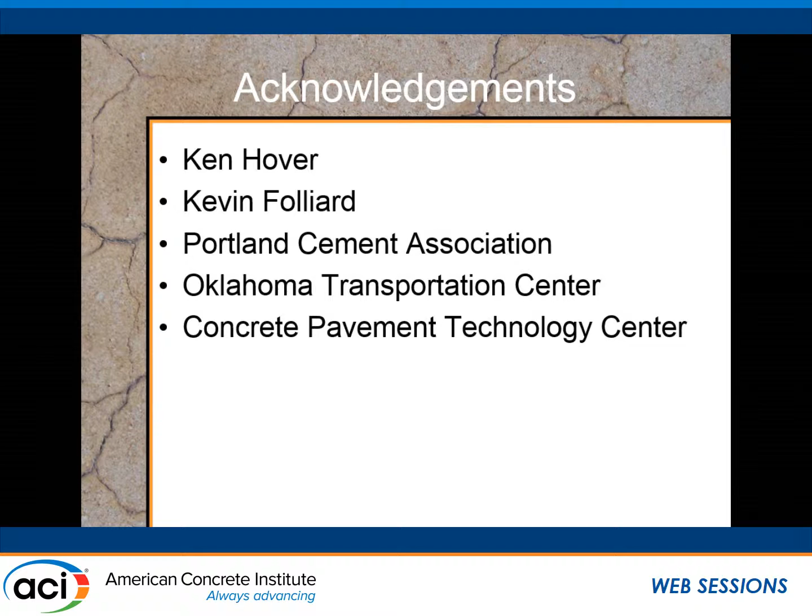I also have to thank the folks that funded the early research on it, and currently there is a research project going on. It's a pool fund study by 16 different groups, all to investigate some of the stuff that I'm going to talk to you about today.

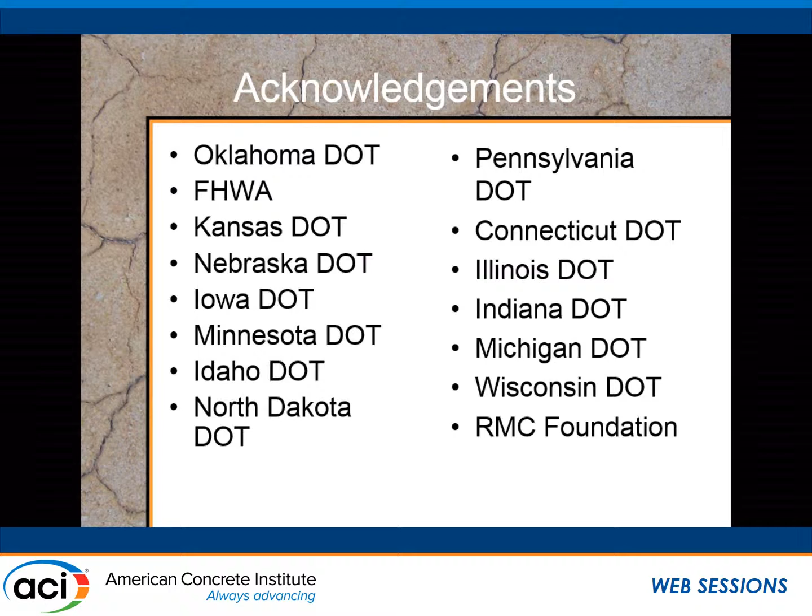So we're going to talk about some basics of air entrained concrete. We're going to talk about the super air meter, and then we're going to talk about the future.

So de-icer salts, that's what we're here about, to talk about today. That's what brings us all together. And the use of de-icer salts are critical for the safety of our traveling public, right? We don't want families sliding off the road, right? We need to take care of that ice, okay? And the highway agencies are becoming much more aggressive, using different de-icers, using pre-treatments, using all kinds of actual techniques to try to make our roads more safe.

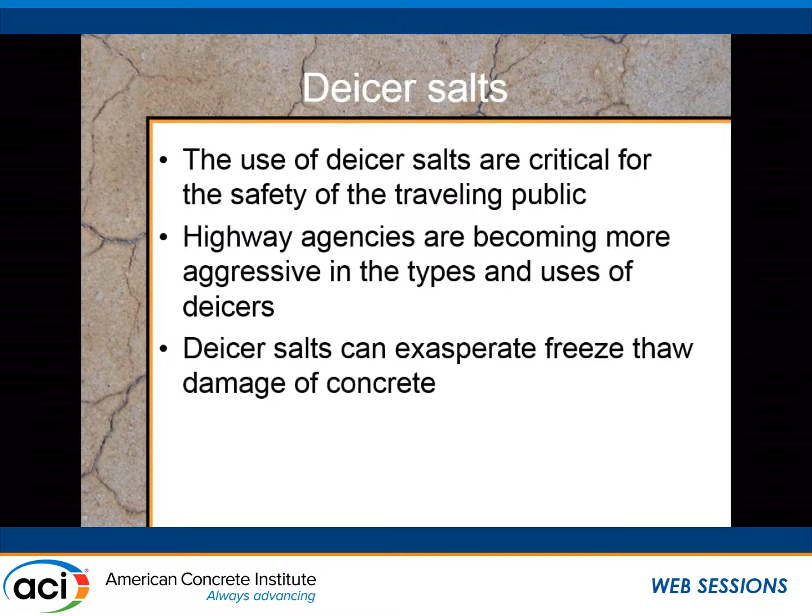De-icer salts has been talked about before, can exasperate freeze-thaw damage of concrete, and this isn't going away. Okay, we've got to figure out how to handle it. We've got to figure out how to deal with it. We're going to talk about freeze-thaw today.

And when we talk about freeze-thaw, it's all about the freeze-thaw triforce. It's all about three things. For freeze-thaw durable concrete, you have to have durable aggregates. You have to have high-quality paste. And you have to have a high-quality air void system.

But I'm only going to be talking about the air void system today. Everything I'm talking about cannot help you if you're next door in the D-cracking seminar. I can't help those folks. Air doesn't help those folks. Well, maybe a little bit, but not really.

I can't help you if someone adds way more water to the concrete than they're supposed to. Can't help you. Can't help you. But air void systems, that's going to be helpful today.

So why the heck do we add air to concrete? Because it's not very strong, right? Well, these air bubbles happen to be the key to the freeze-thaw resistance of our concrete. This is really important, ladies and gentlemen.

Air volume is not necessarily equal to freeze-thaw performance. It's not about the volume. It's about the size distribution of the bubbles. Smaller bubbles are much more effective in providing freeze-thaw resistance than larger bubbles. And let's talk about why.

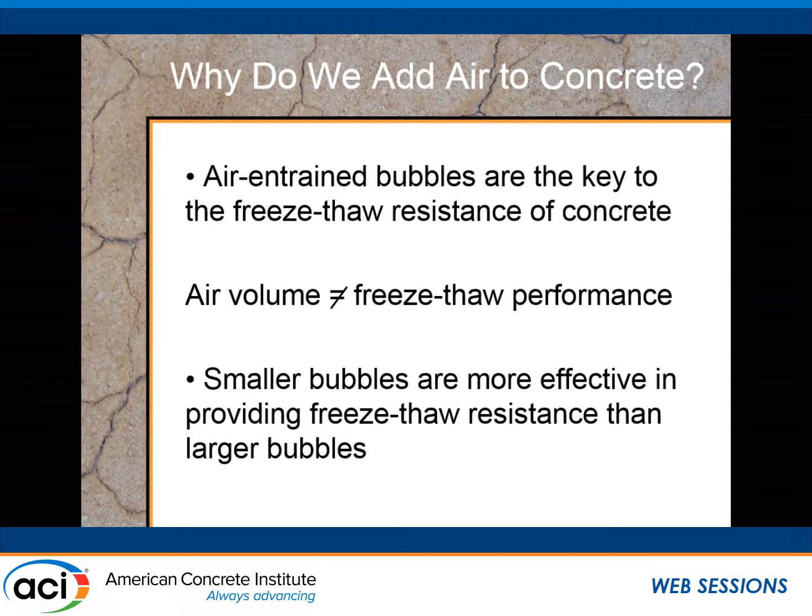So I've got two air void systems, one on the left, one on the right. Both of them have the same volume of air. But we would much rather have the air void system on the right. We'd much rather have the small, well-distributed bubbles.

And why is that? Well, if I'm a water molecule and I'm in this paste and I start to freeze, I just want to escape to a boundary. And if I can provide much more boundaries inside, it's going to provide much more protection. This concept is called the protected paste concept. And we can see we get much more protection out of the air void systems on the right than we do out of the air void system on the left.

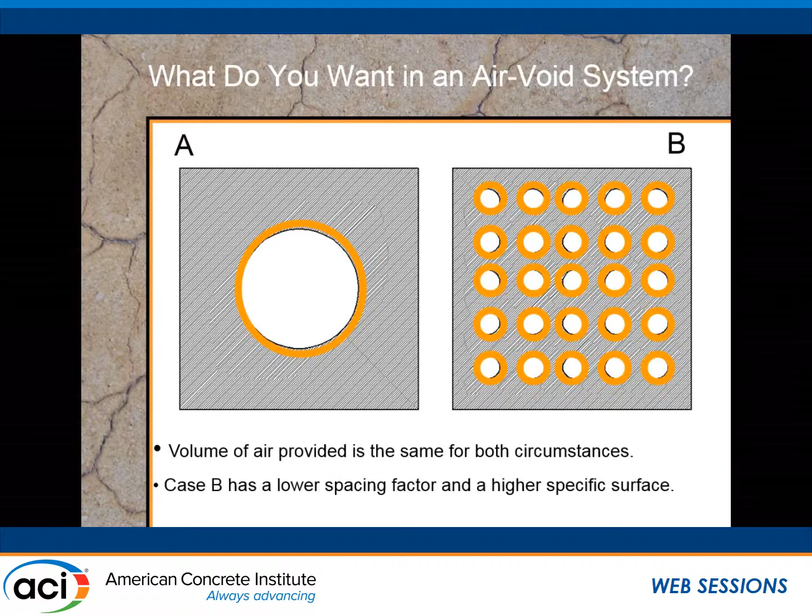So what's that mean? We want small, well-distributed air bubbles.

And it's about distribution, not always about volume. So I'm going to show how we get this information.

Well, the only way to get it now is through a hardened air void analysis. You have to cut concrete, polish concrete, and go through it. Every time you go through this line, you have to hit a button. When you enter a bubble, you have to release the button when you leave the bubble, and it takes a long time. It's not very fun. But out of that, you get this magical number called the spacing factor.

Spacing factor was developed by T.C. Powers. What Powers did, he used 2D stereology to take the 3D air void system and turn it into an equivalent kind of synthetic, supplementary air void system to the real 3D distribution. This is like an idealized concrete or idealized air void system, with average size voids at an average spacing inside the paste. It takes twice the spacing factor number as the diagonal. If you didn't understand anything I just said, it's okay.

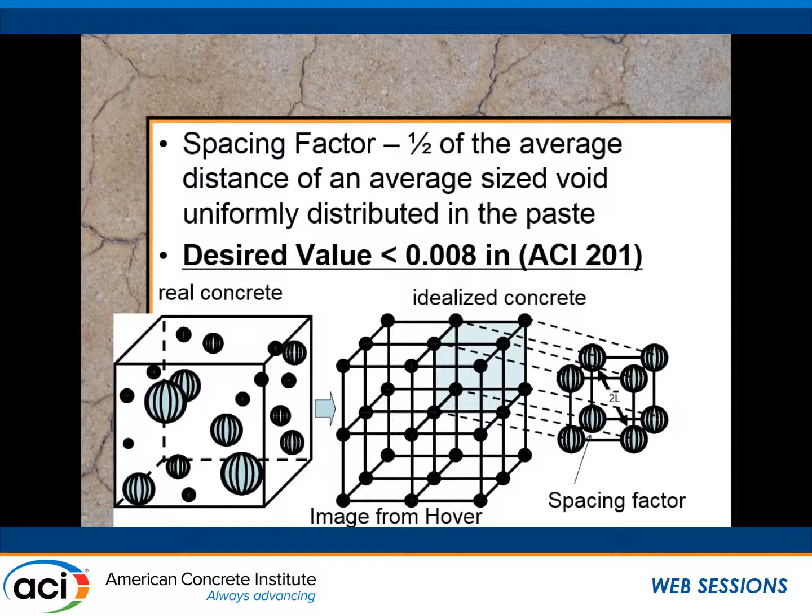Because the desired value, what you're after, what everyone's shooting for, is a number that's less than 0.008. That's the magic spacing factor number. So why can't we just use air content, or total air? Why do we need to care about air void size distribution?

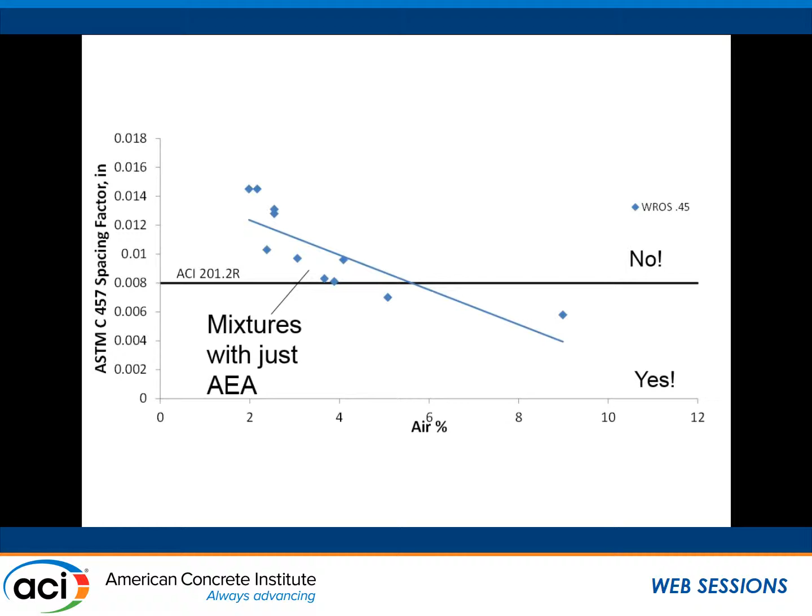Well, let's look at stuff like this. Here we've got air content plotted versus spacing factor. This is a mixture that just has air entrainer in it, just air entrainer. As you add more and more air, spacing factor goes down, goes down, goes down. When you get about 5.5% air in the concrete, you would hit your magic 0.008. People would be happy.

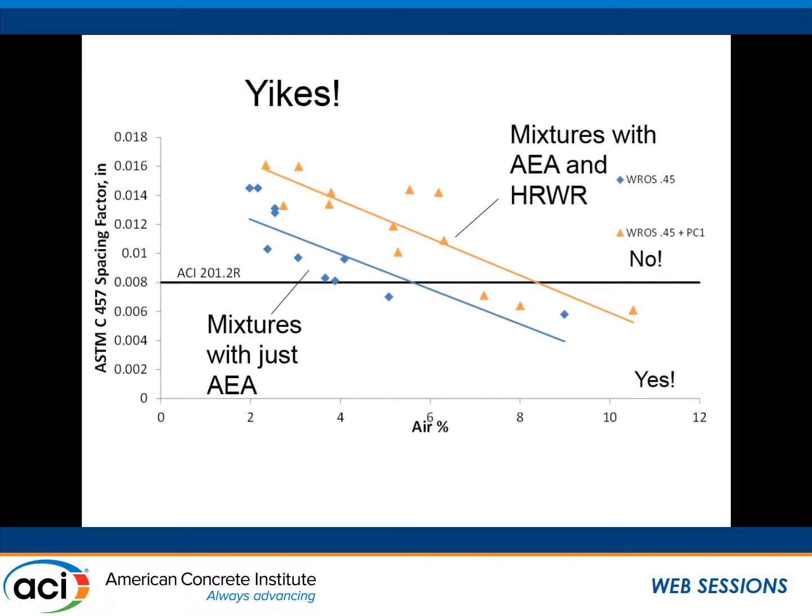So how do you specify this? If you're an owner, and now we're telling you that depending on the admixture combinations, you may need different volumes of air - that's tough, and this is why I call this the yikes graph. This is the oh my gosh. This is kind of interesting.

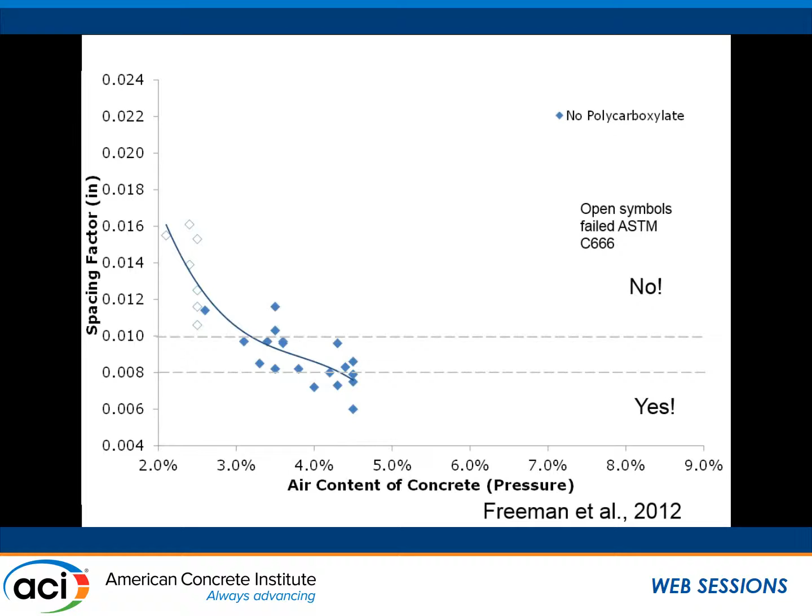Okay, that's neat, that's air. Let's introduce a little bit more data. Again, I've got air content down here at the bottom, spacing factor over here, and some data points that are filled and some that are open. Anytime it's an open data point, that means it failed the freeze-thaw test, the C666 test - meaning the durability factor was less than 70. So this suggests that if I get 3.5% air in my concrete, I'm going to be good. These are mixtures with just air entrainers in them.

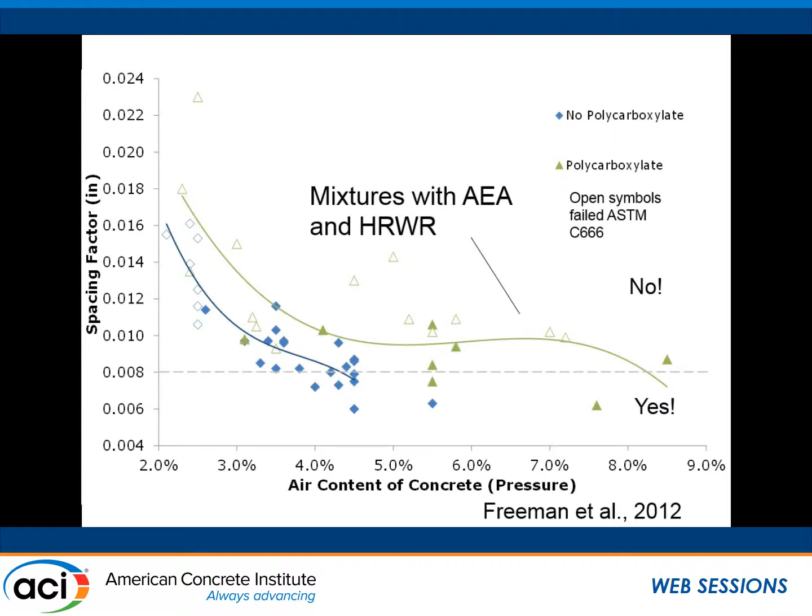Let's look at some mixtures that are a little different - combinations of 5 different commercial high-range water reducers and common air entraining agents. We can see there's an offset in the line, and we notice we have all kinds of open symbols. These are kind of interesting. 7% air is enough to meet every single specification in North America as far as total air content. Yet we're showing that at least in this very aggressive C666 test, they would not pass. So why does this happen? Why is this going on?

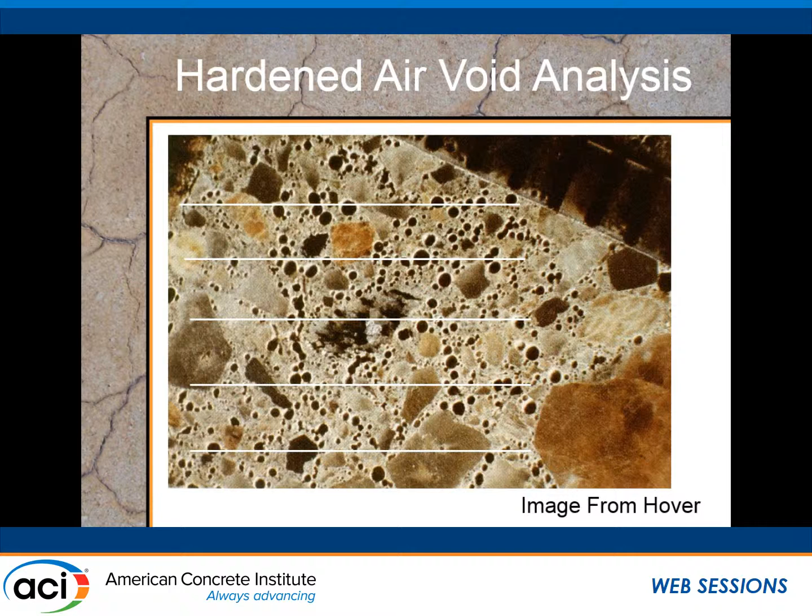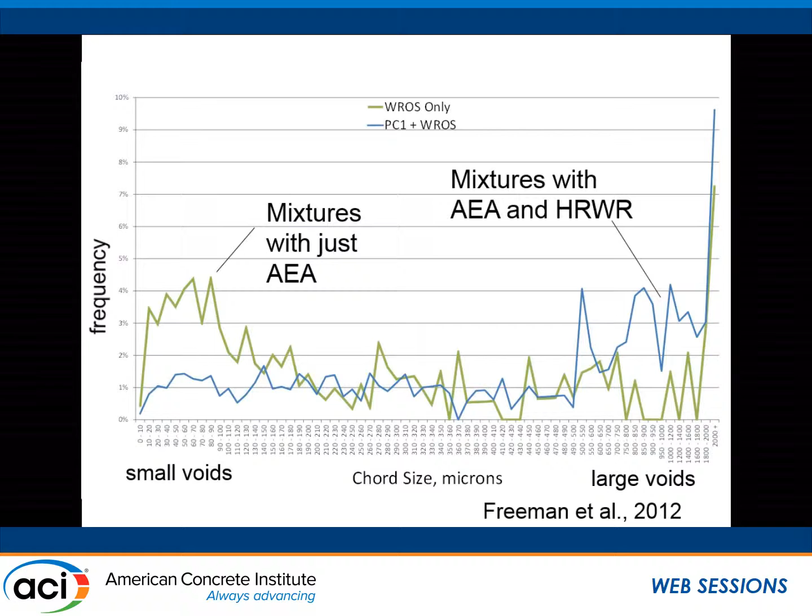We can see here that when you add air from mixtures with just an air entrainer, you get a lot of small voids. That's good, that's good, it's good. This doesn't happen in all of them, and I need to stress that - this does not happen in all of these products, but in some, this system seems to have a lot more voids on the larger side. So when I get a certain volume of air, some more of those are larger voids than in this other scenario.

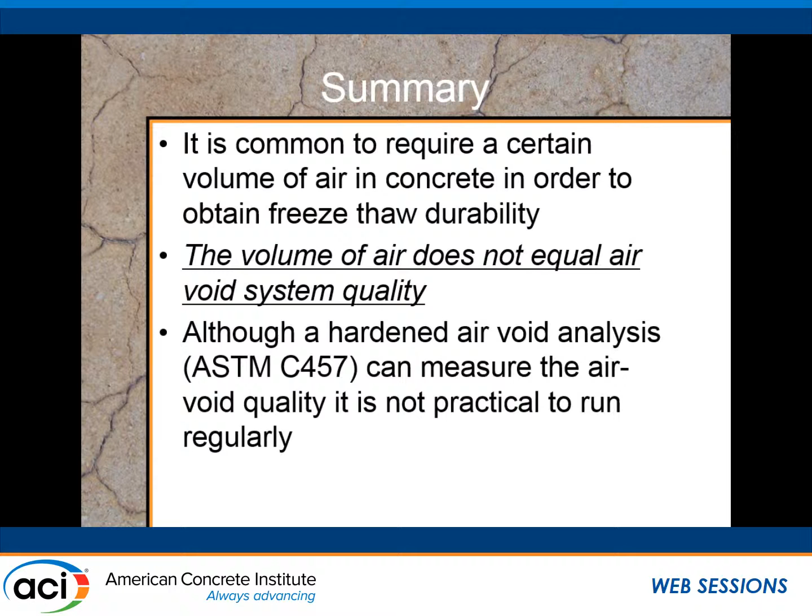So in summary, it's common to require a certain volume of air in concrete to get freeze-thaw durability. But the volume of air does not necessarily equal air void system quality. And although we could run a hardened air void analysis and figure all that out, that's not really practical.

So what do we need? We need a test that can quantify the air void system quickly in fresh concrete. We need it to investigate a significant sample size. It needs to be economical, and it needs to be field ready.

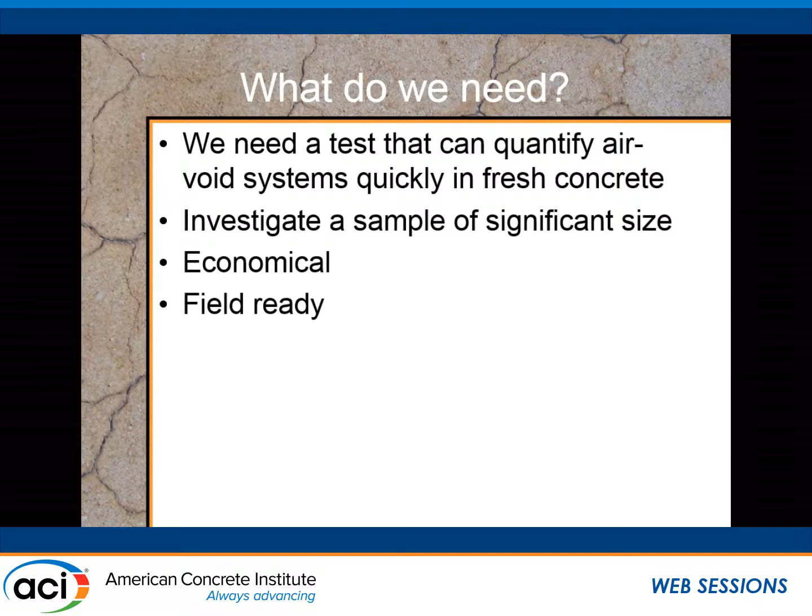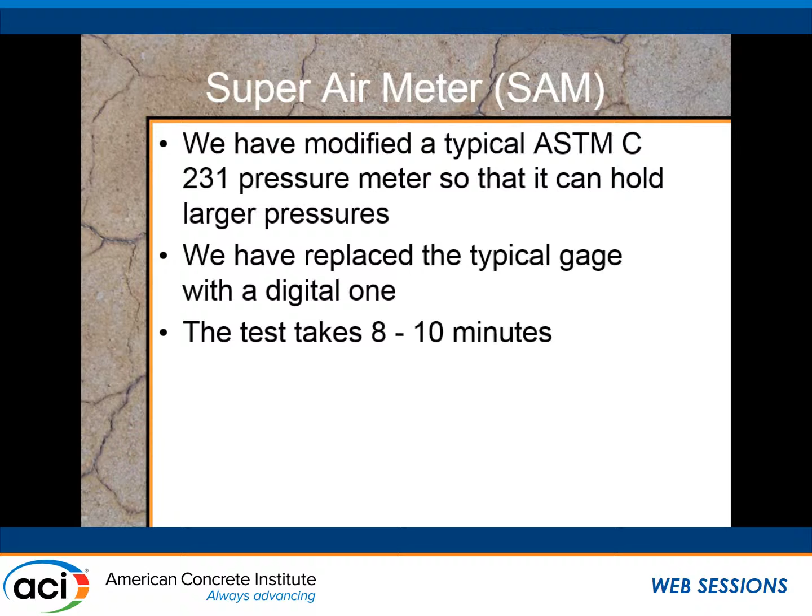I'm going to talk about the super air meter, or we call it the SAM for short. What we did is we modified a typical pressure meter so it can hold higher pressures, and we've replaced the dial gauge with a digital one. The test takes between 8 to 10 minutes to run depending how experienced you are. My students can do it in 8 or less.

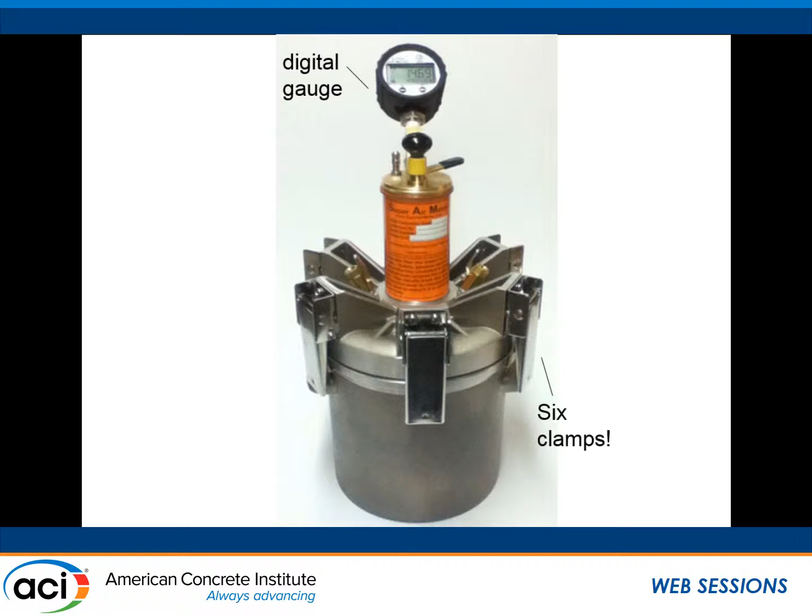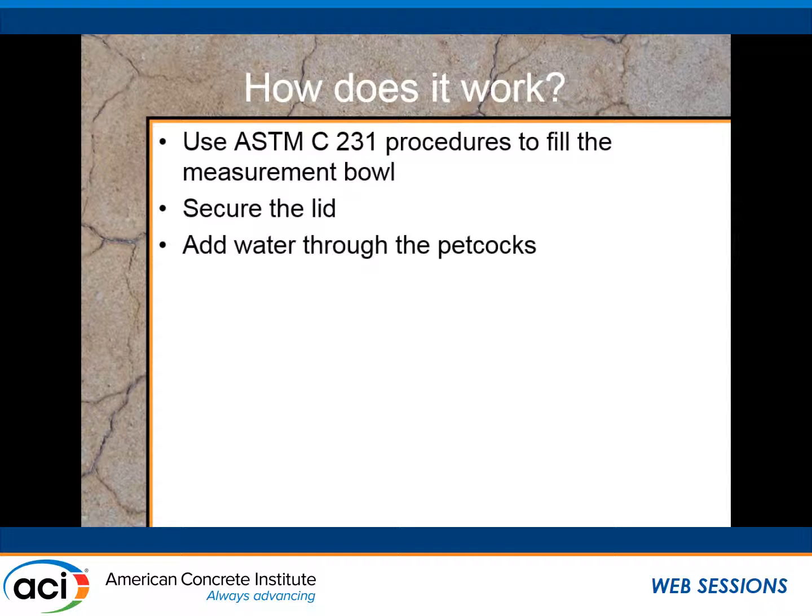So how does it work? Well, you fill the bowl the typical way we always do when we run a standard air test. Put the lid on it, add the water through the petcocks. We're going to be talking about what's going on in the top chamber and the bottom chamber. The top chamber just has air in it. The bottom chamber is where your concrete goes. There's the petcocks, there's the water.

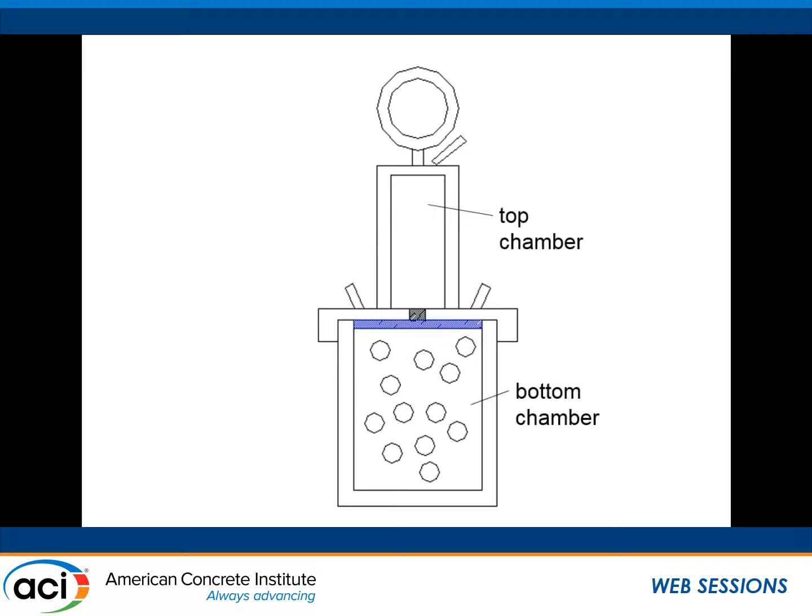If you look at this graph, we have time plotted here and pressure plotted over here. I'm showing the pressure in the top chamber and the pressure in the bottom chamber. We go up to about 14.5 psi, hit the lever, smack it with the mallet - this is what you commonly do when you run an air test. This is where you'd normally stop. But with the super air meter, you don't stop - you leave the petcocks closed and pressurize it again.

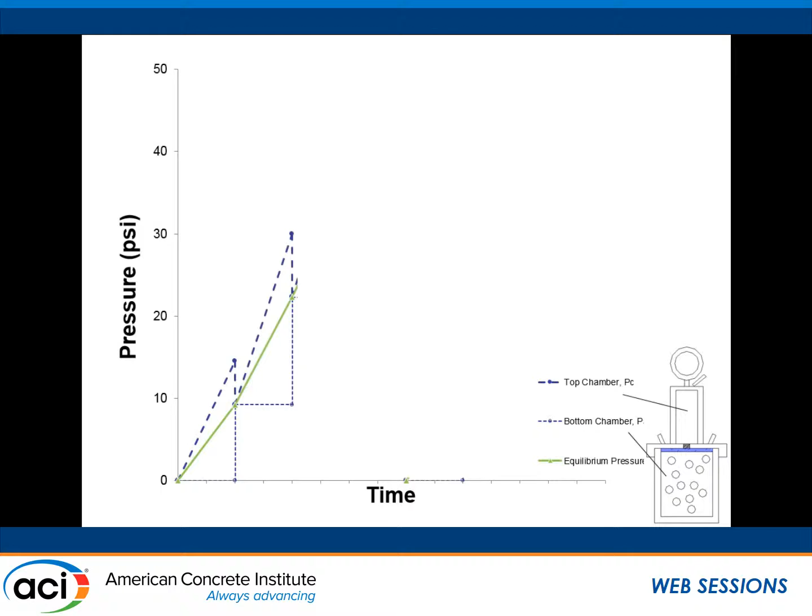This time you pressurize the top chamber up to 30 psi, hit the lever again, and smack it. Then you pressurize it up to 45 psi, hit the lever, smack it again, and you get a curve.

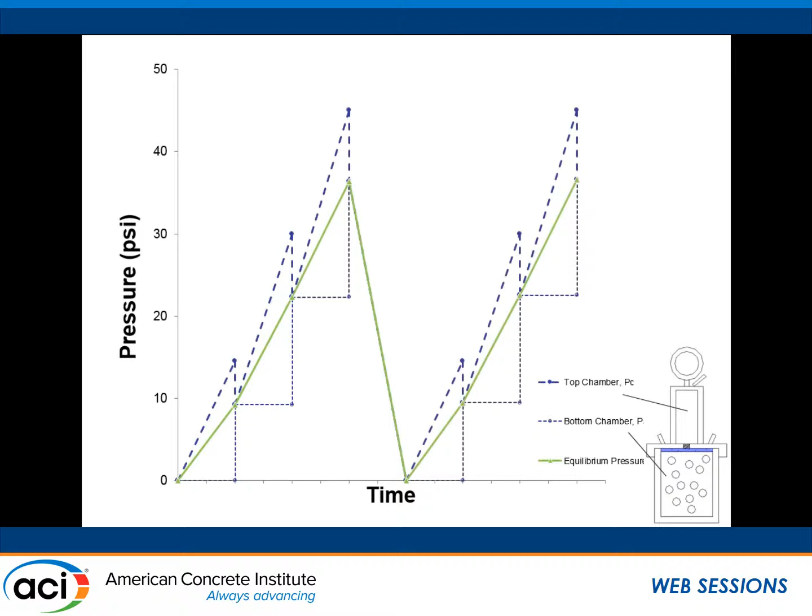Now you release the petcocks - be careful not to spray anybody, unless you don't like them - and then you do it again. You compare the first curve to the second curve, and if you look closely, you'll notice they're not quite the same. The differences between these curves is how we calculate the SAM number, how we actually find out what it is.

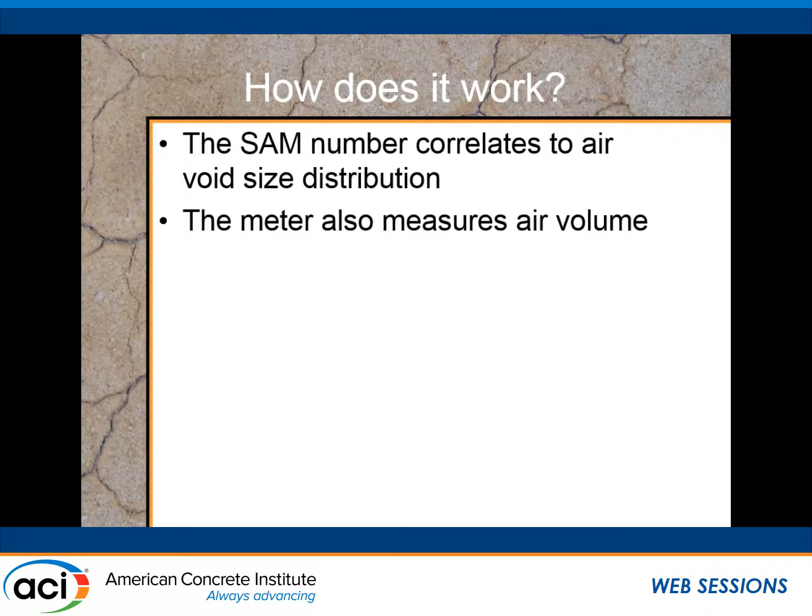So you'd say, how does it work? Well, the SAM number is going to correlate to air void size distribution - I'm going to prove that to you coming up. And the meter also measures air volume, so you still get air volume, but you get this other number too, the SAM. So how can we prove it?

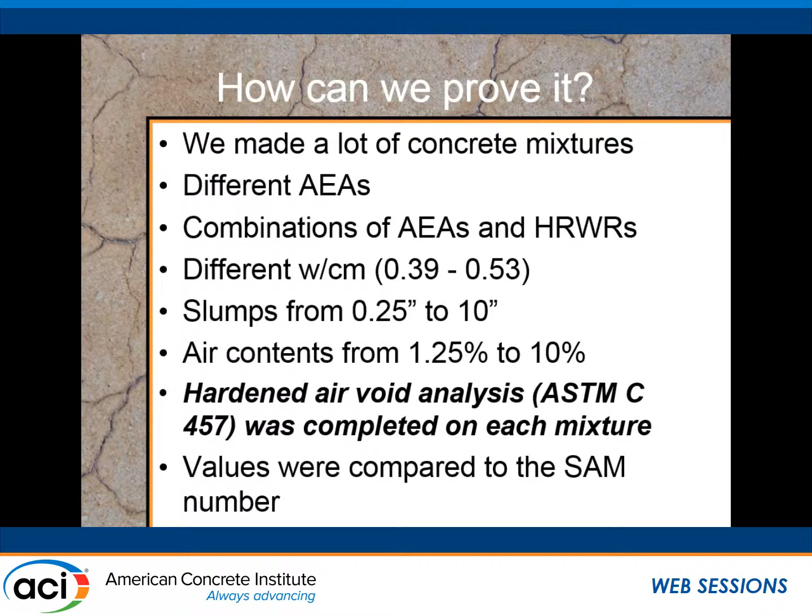We made a lot of different concrete mixtures with different air entrainants, AEAs, different combinations of air entraining agents and high-range water reducers, different water-cement ratios, different slumps, and different air contents. We did hardened air void analysis on every single one of them - about 95 different mixtures went into this data set. The values were all compared to the SAM number.

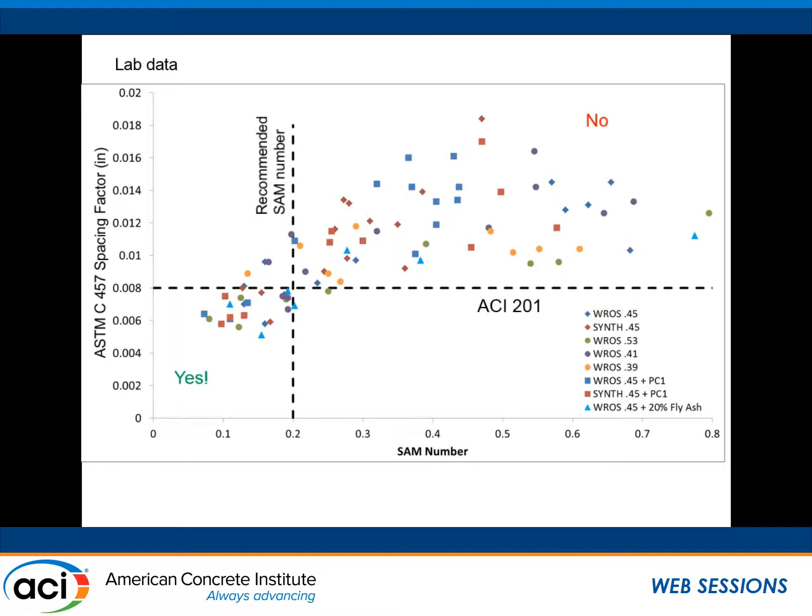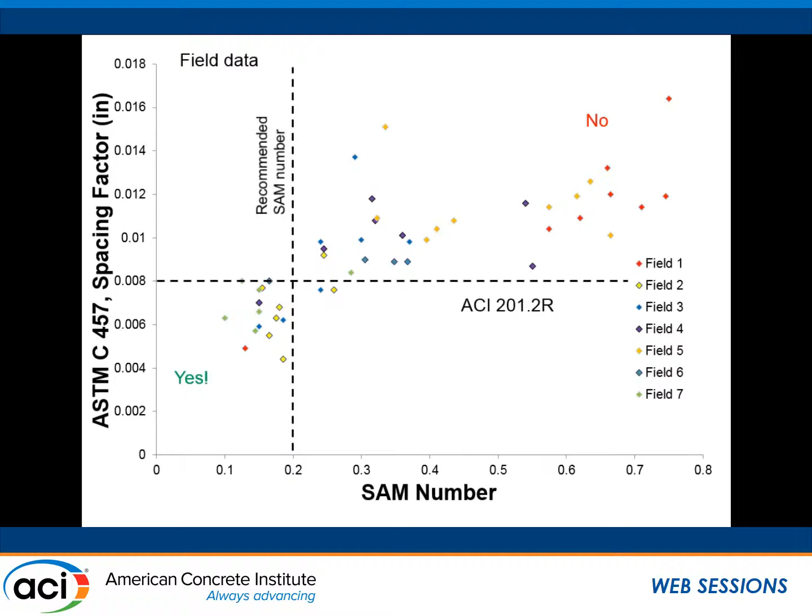Now then we went out and did field data - this is about 80 different field mixes. And again, we see it segments the data in the exact same way - there's 0.2, yes, no, it breaks it up. That's pretty cool. So this is work that's been done by FHWA Turner-Fairbank Labs on the super air meter, and this is what they got.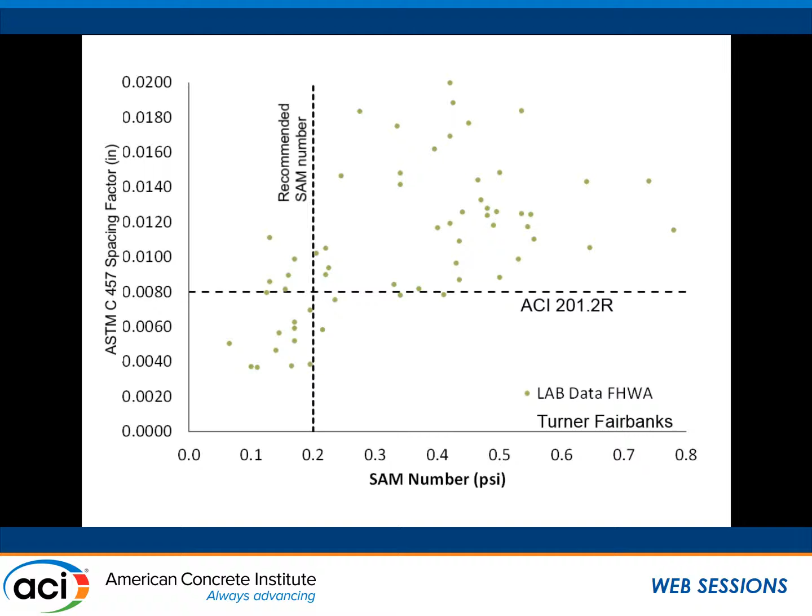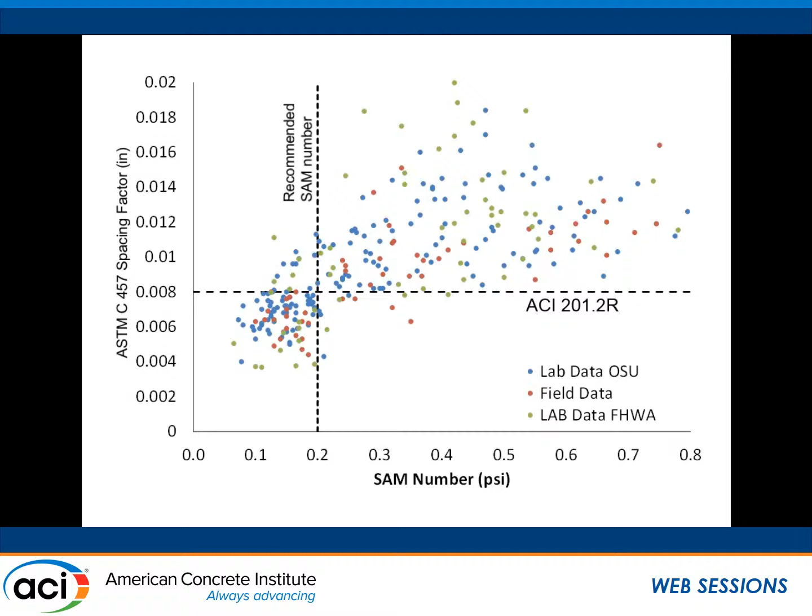Again, this breaks the data up very nicely. They've got like an 85% agreement, I think. Okay, so it's in the ballpark. It's close. And the cool thing is if you put all the data together, it's all agreeing, all suggesting similar things. As your SAM number goes up, your spacing factor goes up as well, and 0.2 does a pretty good job of segmenting the data.

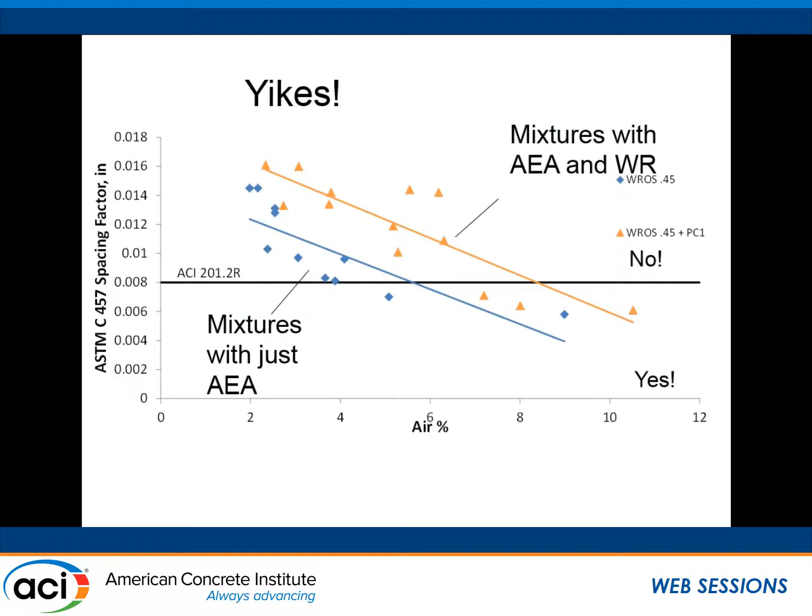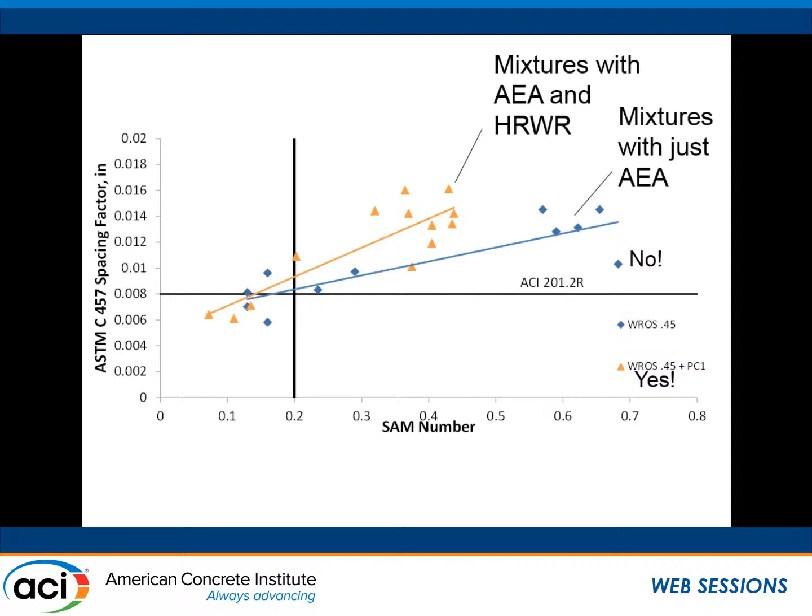So the great thing about this test is that you can take this graph. How do you specify for this? How do you handle this with air volume? Remember, that's air volume on the bottom, that's spacing factor over here. And when you use the SAM number instead, look, it all smashes down here right at 0.2. It does a good job. It helps segment out the data, and it helps make a decision whether this is an air void system that you want or that you don't want.

So people love freeze-thaw testing, and we're just getting started on that. Freeze-thaw tests take about 3.5 months to run, so they take a long time.

But we have SAM number over here, durability factor over here, and here's 0.2. Okay, and you can see this is great, great, great, and then you kind of fall off the hill of death if anyone's run a bunch of these tests. There's a hill of death right here. You just can't see it because everyone dies once they go there.

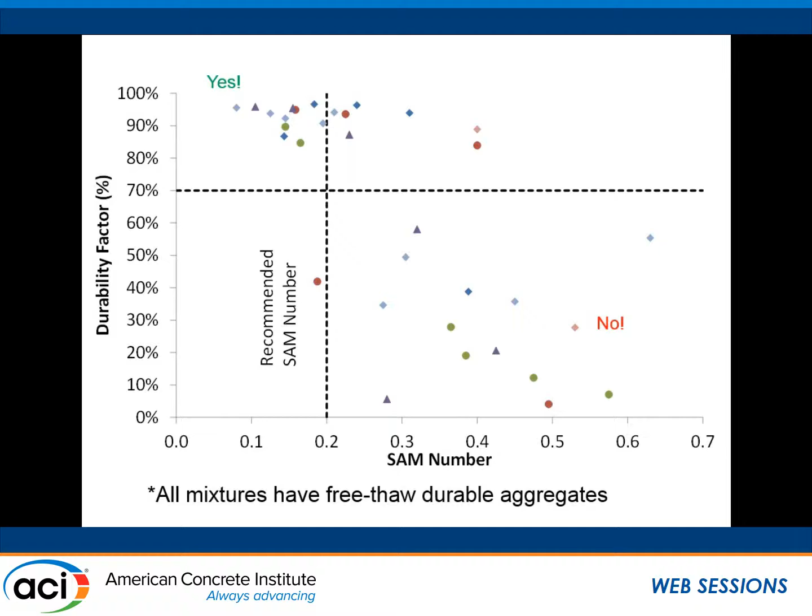Okay, but that's—you can laugh, you know, that's allowed, right? Okay, great. Only at the funny jokes, right?

So the SAM number of 0.2 seems to correspond to the spacing factor of 0.008. Over 90% of the data is correctly separated with this limit, and the SAM number seems to correlate with some C666 testing. Don't worry, a bunch more is coming.

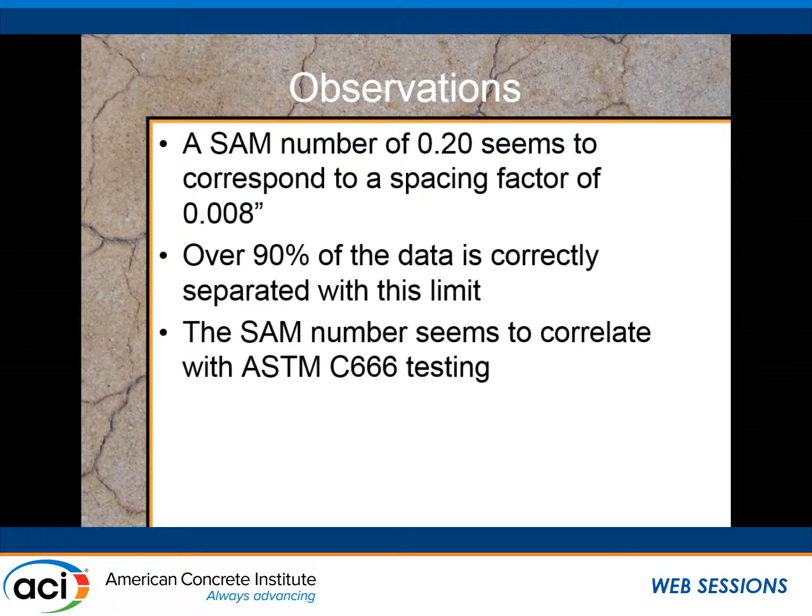So how consistent is it? Well, we ran 95 different mixtures with 2 meters, okay, and compared them head to head. We're going to compare air contents and SAM numbers. And there are some tweaks that have been made to make a typical air volume test a bit better.

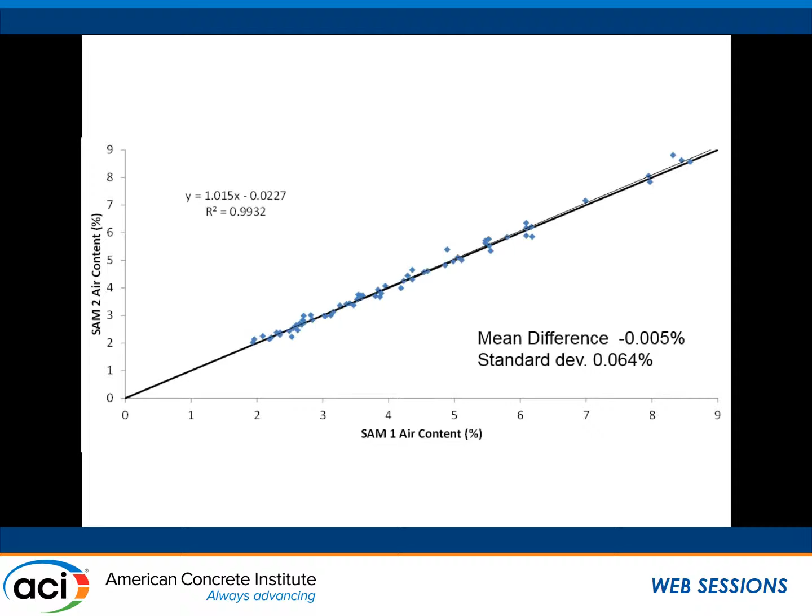And once you do that, if you compare SAM number 1 versus SAM number 2—this is like just the air content from the first SAM versus the air content from the second SAM—the mean difference is 0, and it's very, very tight. It does a good job, okay?

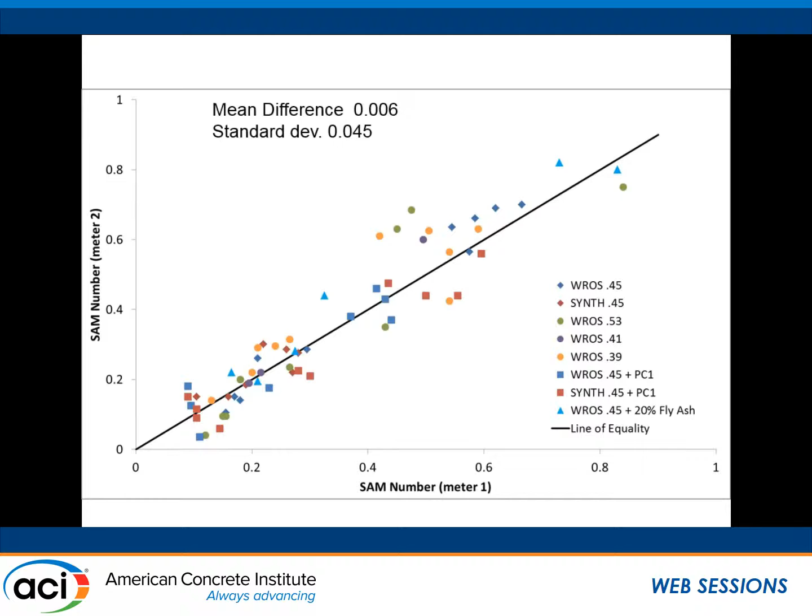But when you compare SAM number from meter 1 and SAM number from meter 2, again, the mean difference is 0. There's a bit more spread in the data, but again, not so bad. It's given us a lot of data that we never had before.

So I know you're asking about this: how does this work? How does it really work? What is the science behind what's going on here? We'll start talking about that, and there's still work ongoing.

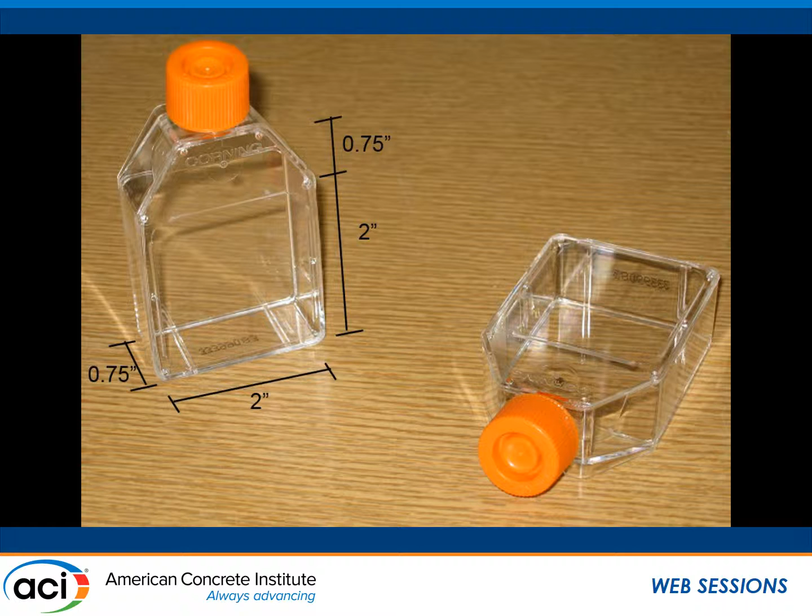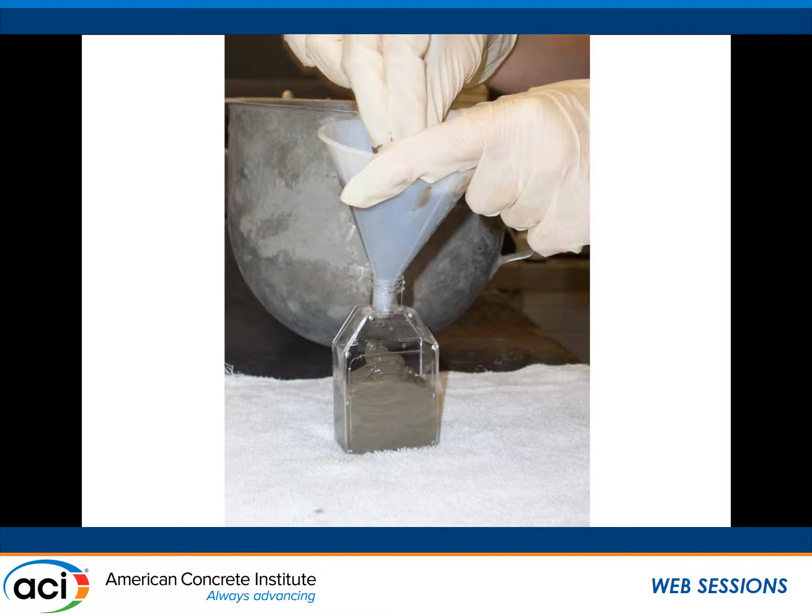We're going to take some bottles, okay, about 3 inches tall, about 2 inches wide, and fill them full of cement paste, okay? They're air-entrained cement paste. We're going to turn the bottles on the side. We're going to actually add a straw to the top and a bit of water, and turn them on their side. So this is the bottle. They're turned on their side, and some bubbles are going to rise up and get caught on the surface, and we're going to be able to look at them with a stereo microscope, okay?

And then we've got this air pump over here that we can pressurize the system, and we can look at the bubbles. This is really important: these bubbles are not inside cement paste. These bubbles are in the bleed water, right? They've risen up, and they're in the bleed water, okay? That's what we're going to be looking at.

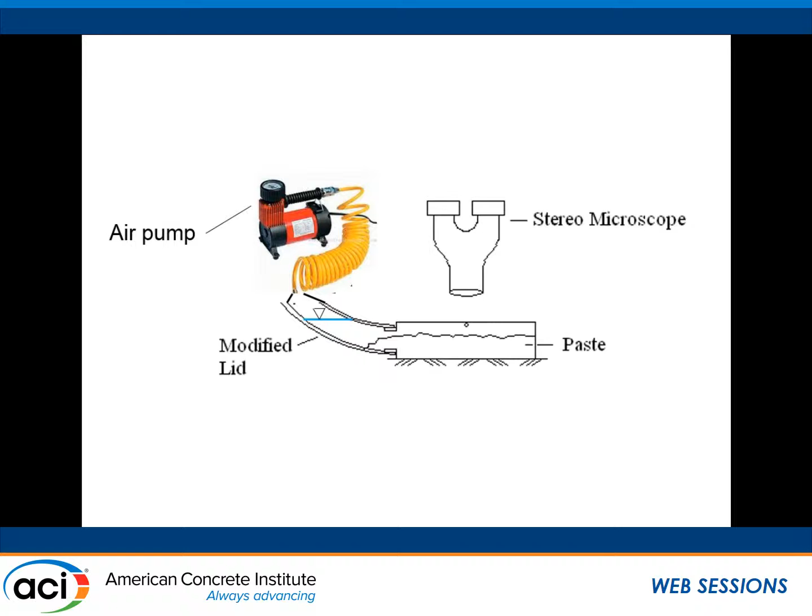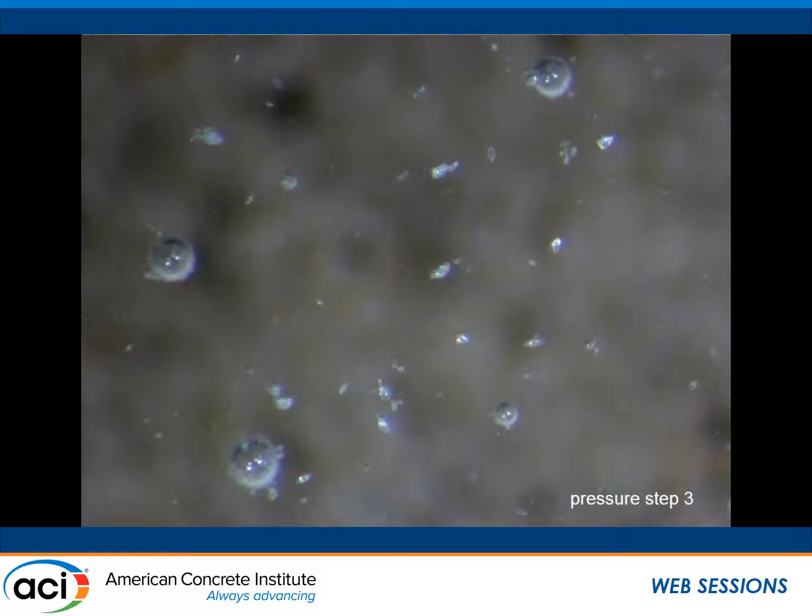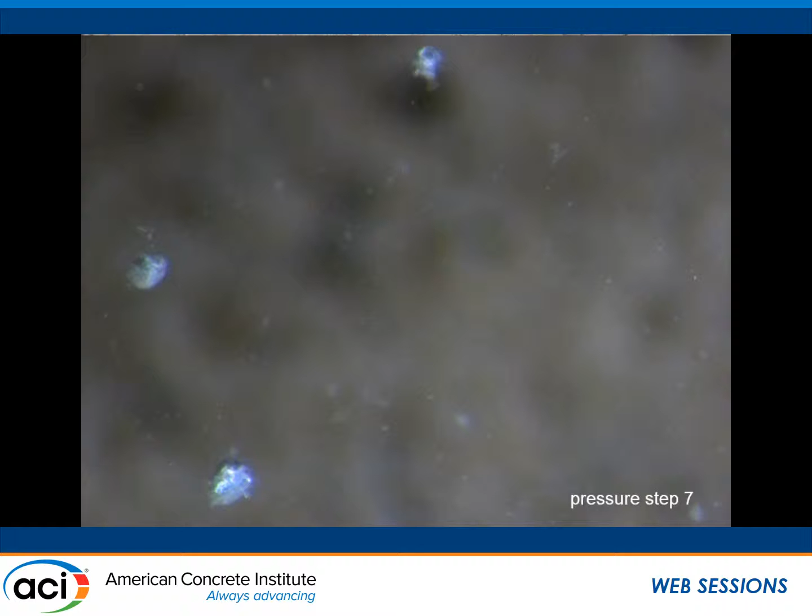So here's a typical air void system. Here's atmospheric pressure. Let's start looking at what happens when we go to 1 pressure. Things move around a bit. Here's 2—we can notice some of these bubbles don't look as happy. We go to 3—does anyone notice there's less bubbles? We go to 4, 5, 6. Holy cow, where are the bubbles going?

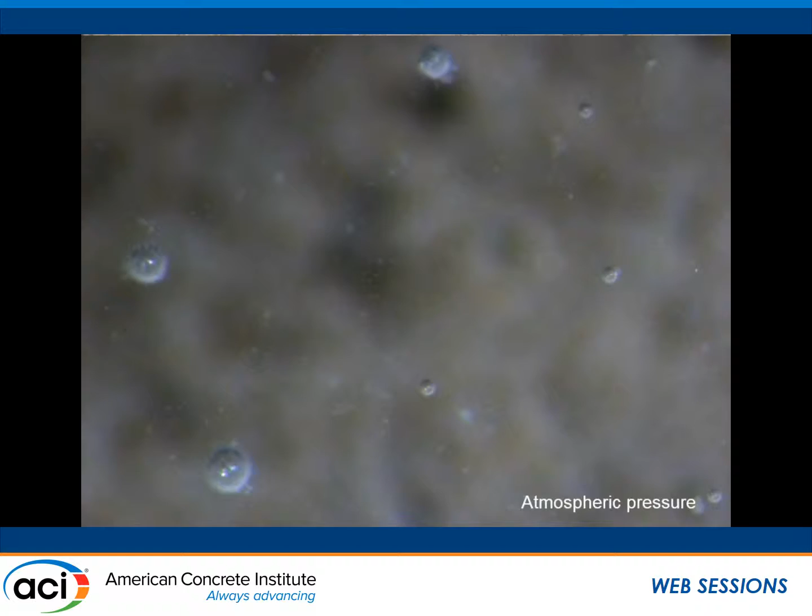Well, let's go back to atmospheric pressure. When you go back to atmospheric pressure, a couple bubbles come back. Some of these bubbles come back. It didn't dissolve—what's going on? As you increase the pressure, you're dissolving bubbles. You're dissolving it. Let's talk more about that. This is what it used to look like, and this is what it looked like after you brought it back to atmospheric pressure—before, after. So as you increase the pressure, you're actually dissolving the small bubbles into solution.

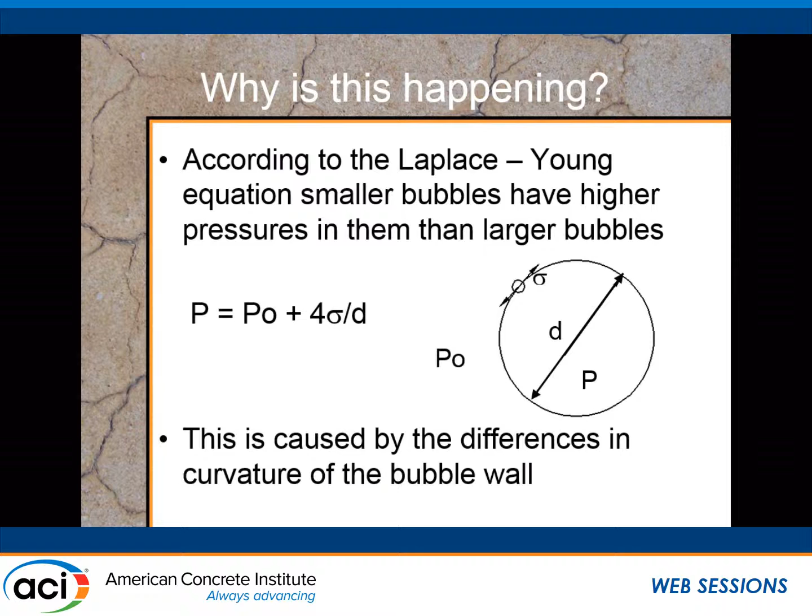So this means, since diameter is in the denominator, as bubbles get small, this internal pressure goes up. Let's look at a plot. Big bubbles, this is my pressure, not much above atmospheric. Small bubbles, higher than atmospheric pressure. Does that make sense to everybody? Smaller bubbles have a little bit higher pressure in them.

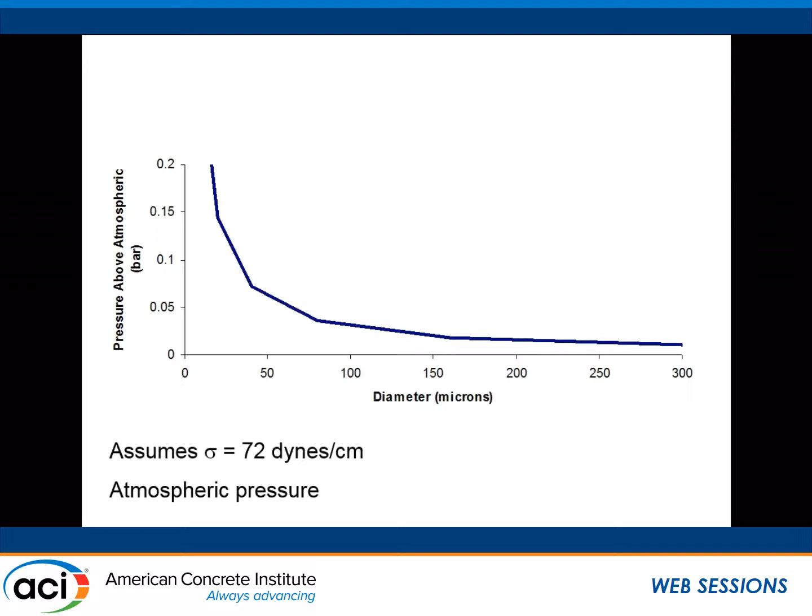So as you start to increase the pressure, when air gets to a certain pressure, it will dissolve. This is Henry's law. It's usually used for lakes and streams and people worried about pollution, stuff like that. But it says that when air, or any gas, gets to a certain pressure, it will dissolve and go into solution. Be gone, basically. So that's kind of what's going on with these small bubbles.

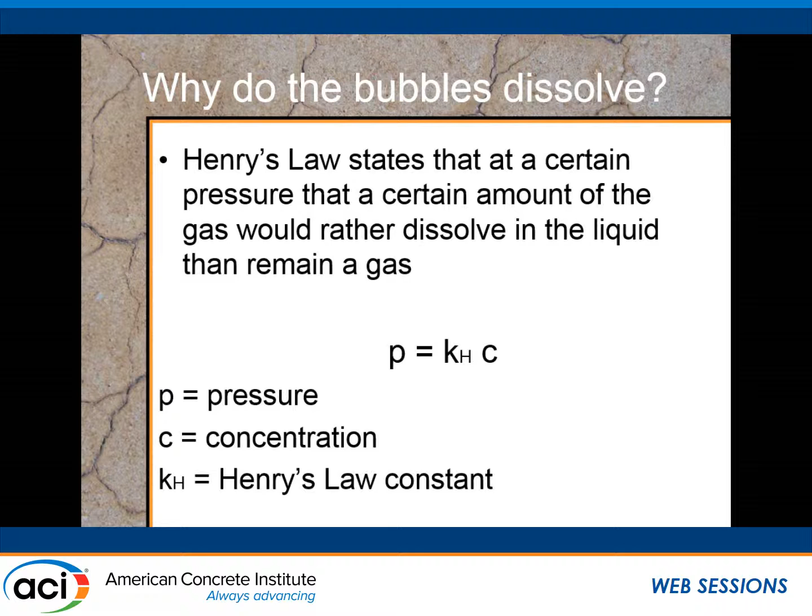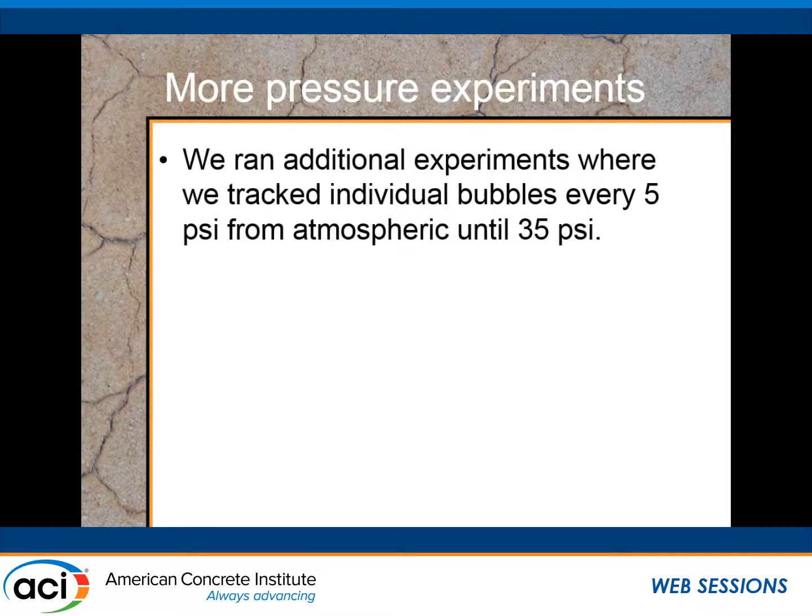So we did a couple additional experiments where we actually tracked individual bubbles every 5 psi in pressure. We went from atmospheric pressure up to 35 psi, followed individual bubbles, and this is kind of interesting. I've got 2 systems here. The system on the left is what I'm going to call the spaced bubbles, the bubbles that are a little far apart, the bubbles that would have a poor spacing factor. The bubbles on the right is what I call the close bubbles, bubbles that are a little closer to one another. Size distribution is very similar, mixture is the same, air content's the same.

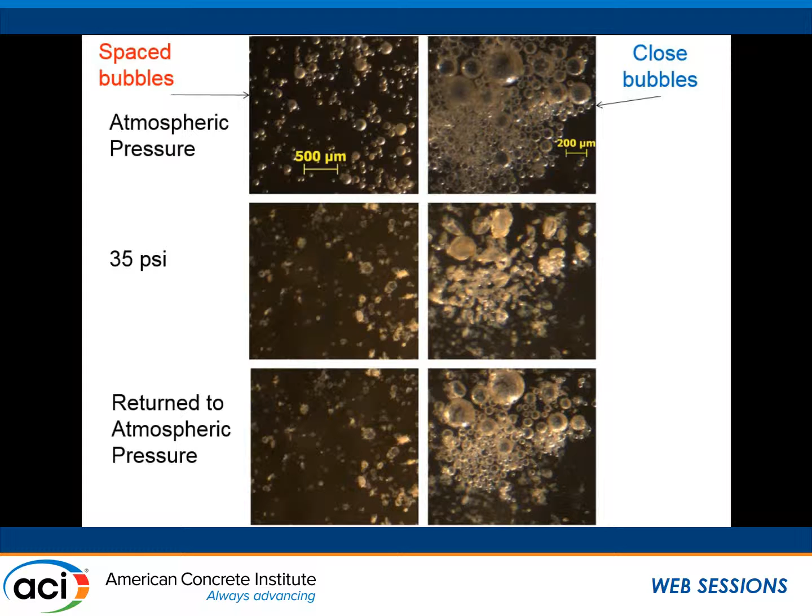Some are close together, some are spaced apart. As I increase the pressure up to 35 psi, these bubbles that are far apart, where are they? They've dissolved. But look here, the bubbles that are close, some of them are still around. Interesting. When I go back to atmospheric pressure, not very many of these bubbles come back, but a whole bunch of these do. When you bring the bubbles closer together, they perform differently under pressure than if they're further apart. And that, in my opinion, is how fundamentally the Super Air Meter works.

Let's look at it graphically. I'm showing the spaced bubbles, bubbles far apart, versus close bubbles. I picked these bubbles on purpose because they originally were about the same diameter. And as you increase the pressure, these spaced bubbles go down and down and down, and then they dissolve. Look at the bubbles that are close together. Sure, they go down in size, but they don't ever dissolve. And once you decrease the pressure, they come back. I think this phenomenon is exactly why the Super Air Meter works.

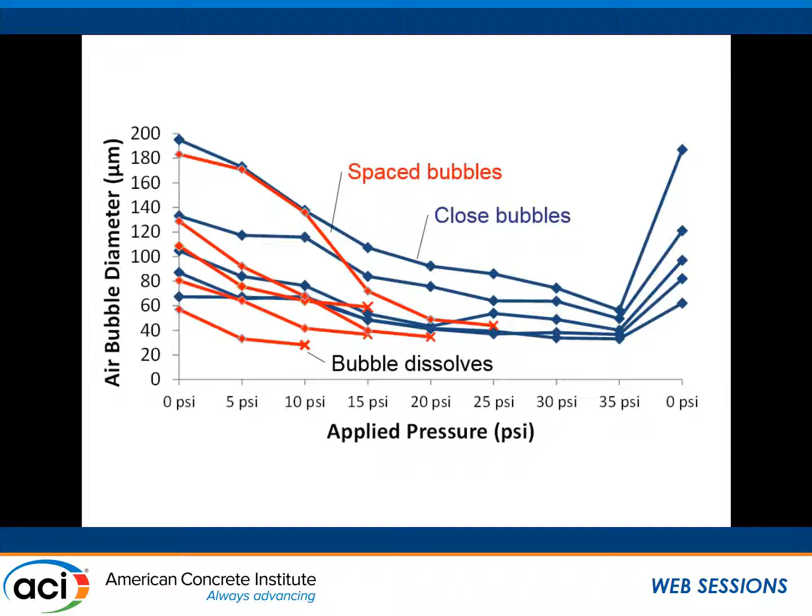Okay, we're working harder on it now. So the close bubbles respond differently to pressure than the spaced bubbles. The close bubbles do not dissolve at the same pressure as the spaced bubbles. Those are two true statements. So what are possible mechanisms? We can spend the whole rest of the day talking about this. Bubbles respond differently to pressure when they are close.

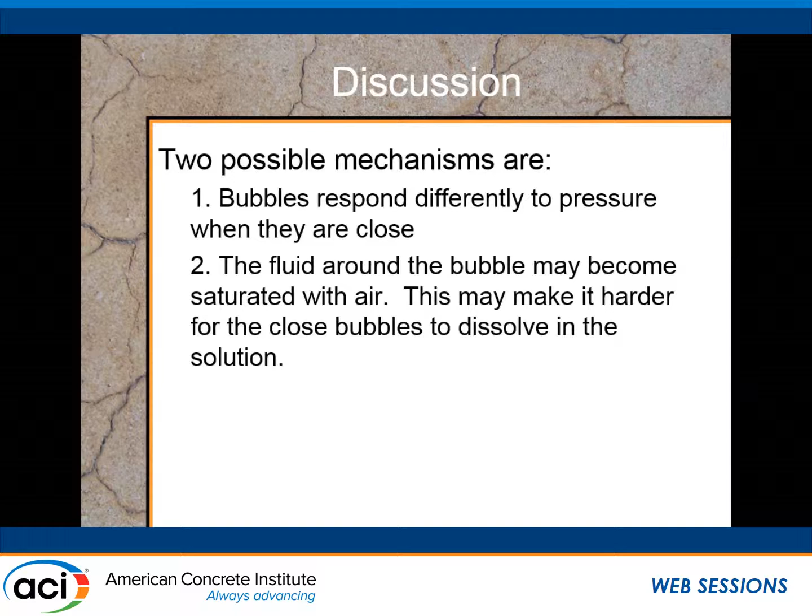That's a possibility. It also could be that the fluid around a bubble may become saturated in air, maybe, and this may make it harder for the close bubbles to dissolve in the solution. Let's just say the famous words, more research is needed, right? It's our academic mantra, right?

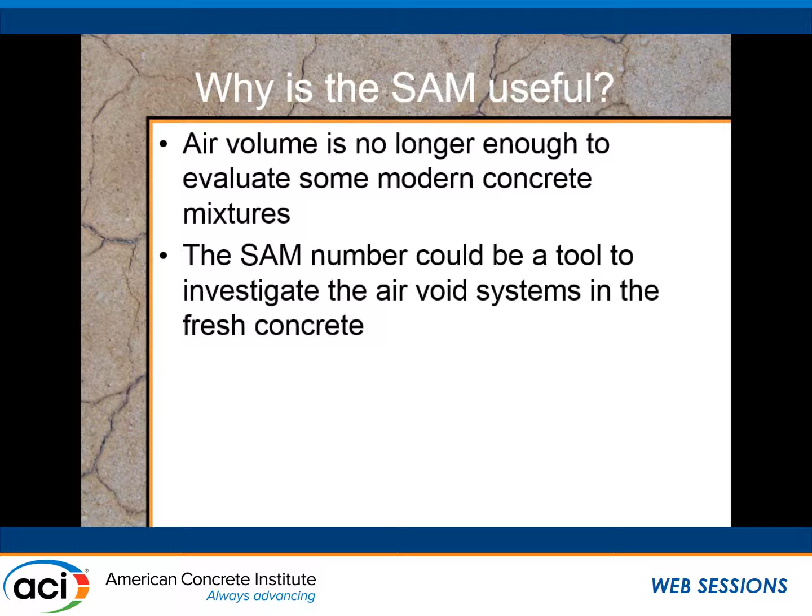So why is the SAM useful? Let's get back to reality here. Why is the SAM useful? Air volume is no longer enough to evaluate some modern concrete mixtures. And the SAM number could be a tool to investigate the air void systems in fresh concrete. It could be looking at admixture combinations, cement types, SCMs, sand gradations, haul times, consolidation from vibration, pumping, all different types of mixers. The list could go on and on and on.

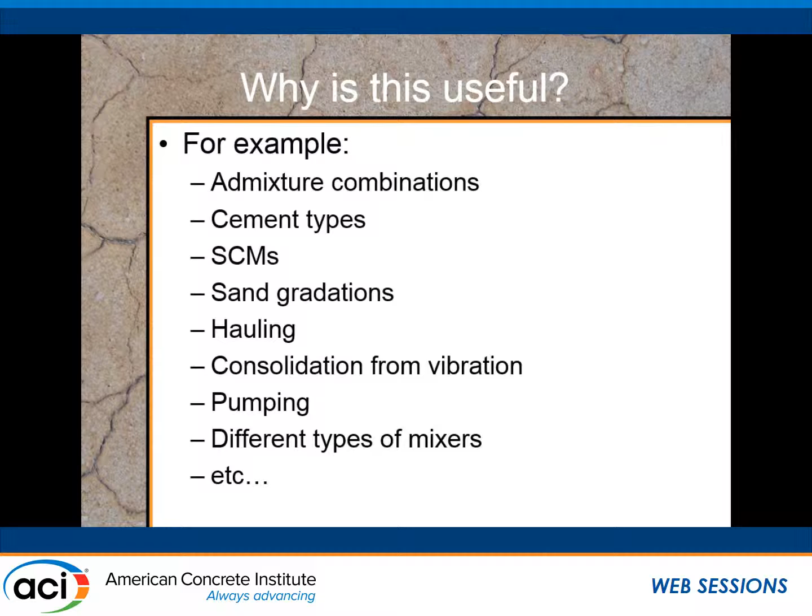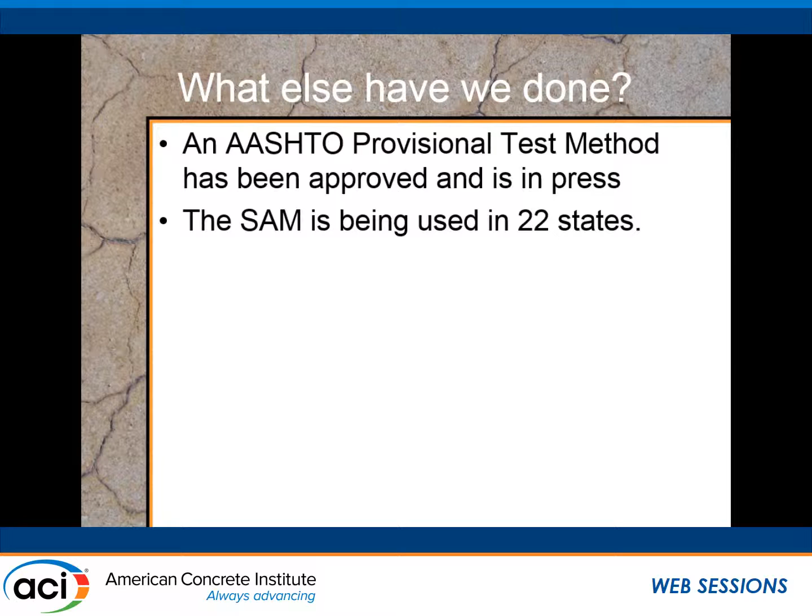So what else have we done? Well, the good news is there's an AASHTO provisional test method that's been approved over the SAM number, or over the SAM. That's great. And the SAM is currently being used in 22 different states right now. So that's also pretty awesome.

So how can you guys help? Well, you can tell someone else about the Super Air Meter. You can try the Super Air Meter for yourself. And if you do, please share your data. Send a cylinder, we'll do the hardened air void analysis. We do it all the time. We're really good at it.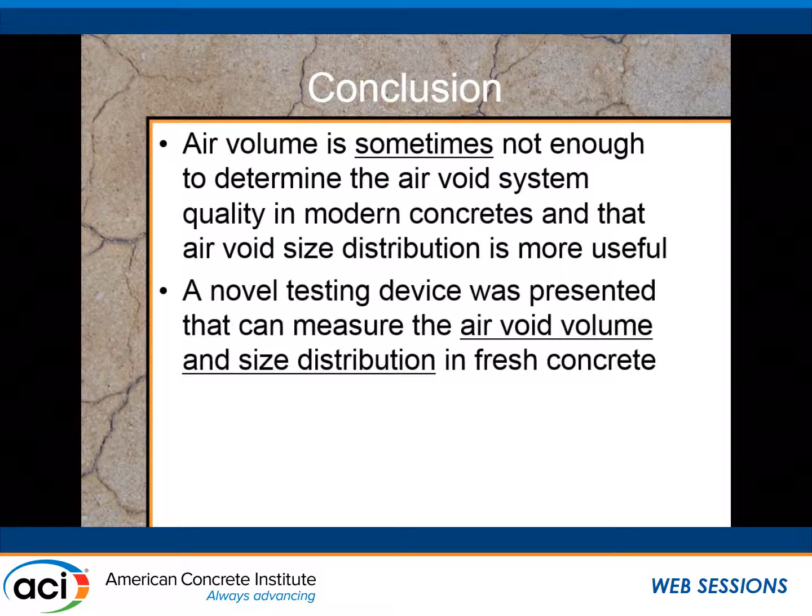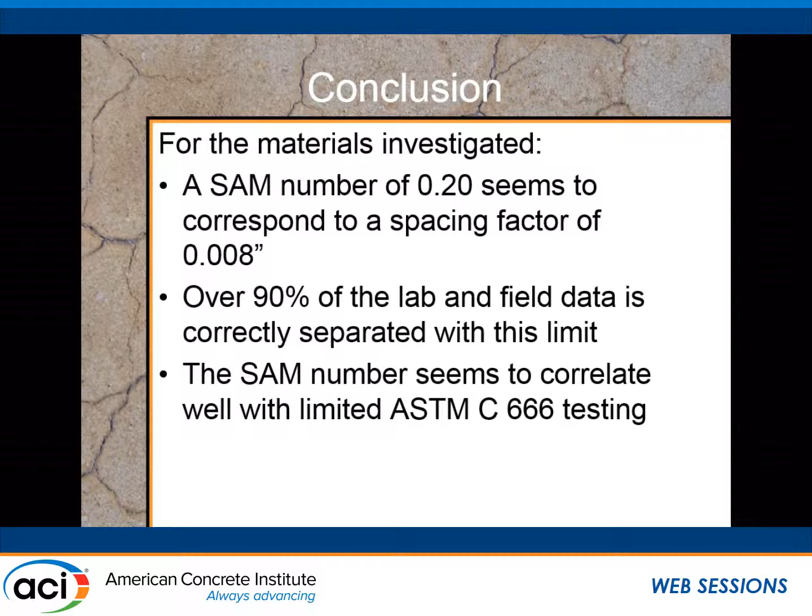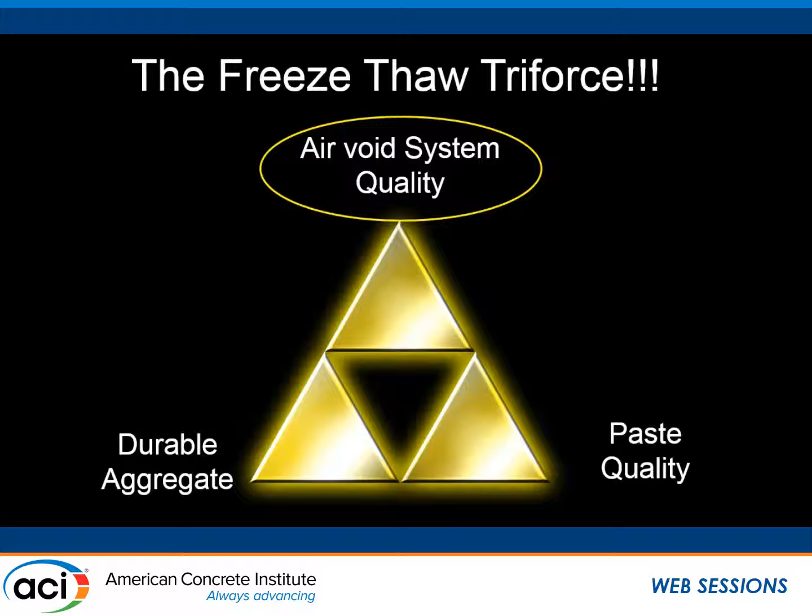So in conclusion, air volume is sometimes not enough to determine the air void system quality in modern concretes, and the air void size distribution is much more useful. A novel testing device was shown that can measure the air void volume and size distribution in fresh concrete. The SAM number of 0.20 seems to correspond to a spacing factor of 0.008, and over 90% of the lab and field data was correctly separated by this limit. The SAM number also seems to correlate well with the limited freeze-thaw testing. Remember, it's all about the freeze-thaw Triforce, and I only talked about one leg, the air void systems. Can't help with aggregates, can't help with paste quality. Superairmeter.com is where you can find out more information about it.